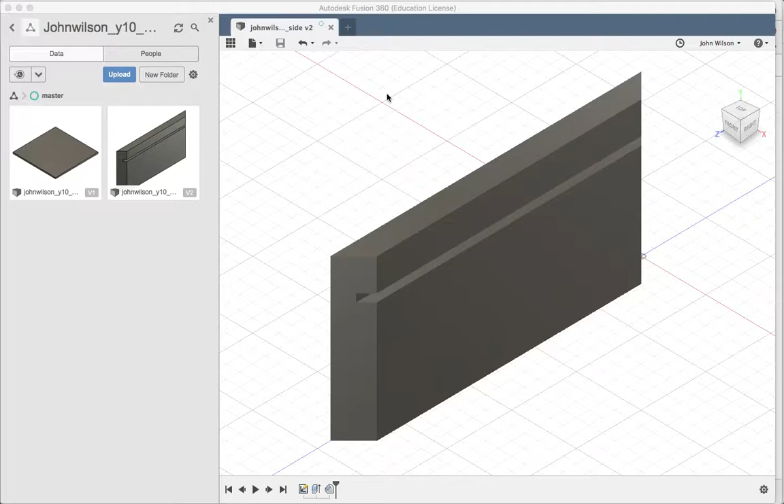Okay, so we're now going to start another drawing. I'm going to click a new tab there. I can close that one if you want, it's all saved, so it's all good. And this drawing is going to be our assembly.

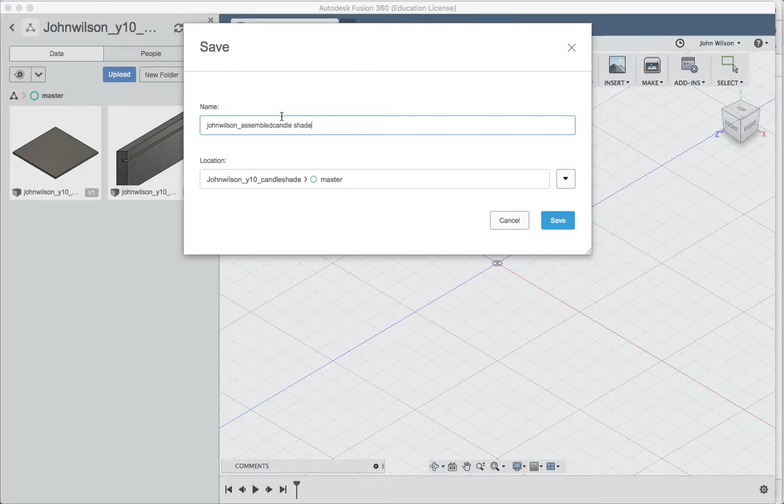Okay, same routine as before. Sorry to keep boring you with the same thing, but it does take a bit of getting used to. So, John Wilson assembled candle shade, there we go. Make sure we're going into our right folder, click save, and a little thumbnail is going to appear.

In our data panel here. And so we can make sure that we're saving as we're going. We're not going to lose everything. Close my data panel, get plenty of space. Oh sorry, no, beg your pardon, I'm going to leave my data panel open for this one, and you'll see why in a second.

So the first thing I'm going to do is look at our blank thumbnail here because there's nothing on our drawing yet and we haven't saved anything. The other thing is, you won't be able to carry out the next operation unless you've already saved it, so make sure you saved it as assembled version.

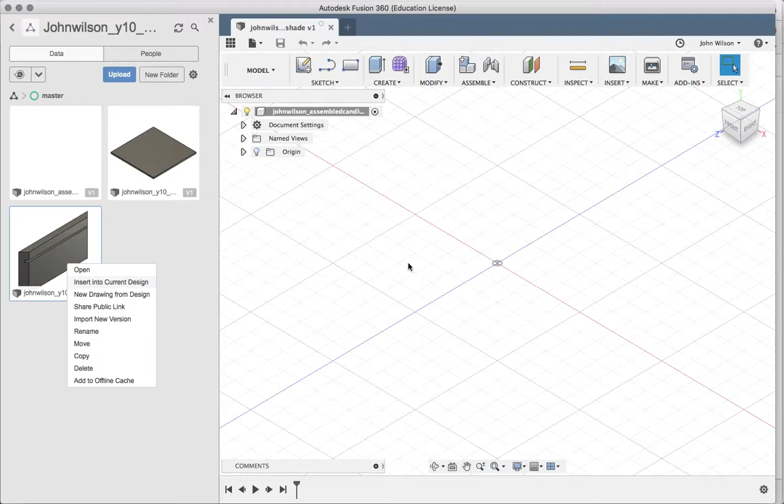And then I'm going to right click on this one, and you'll see that it's got an option to insert into the current drawing, current design. So I'm inserting our side piece, which we've already done, into the new one here. Okay, and it's going to pop up and appear there.

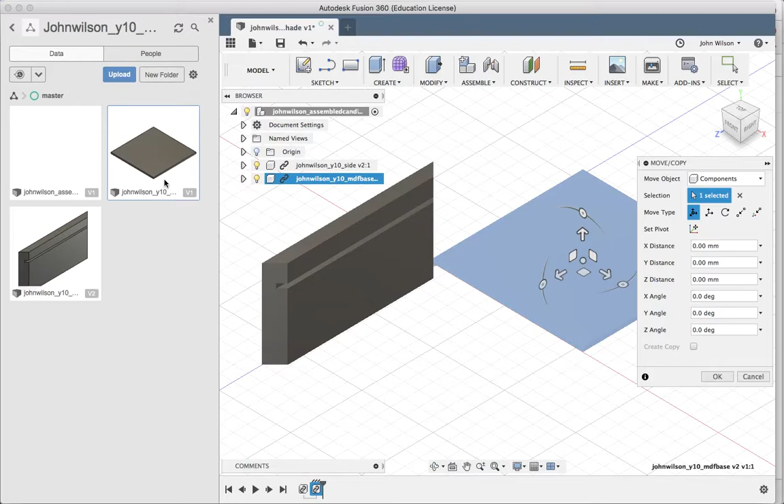So as soon as you put it in there, you'll see it's highlighted blue, telling you what the drawing name is. I'm just going to click OK on that. Then I'm going to do the same for this one, and when I insert this, there you go, same thing again, I'm going to click OK.

Now, at the moment they're not in position, they're not in their relative positions. The piece of MDF is supposed to be in the slot. So how do we do that? Well, the way we do that is by selecting the pieces that we want to touch.

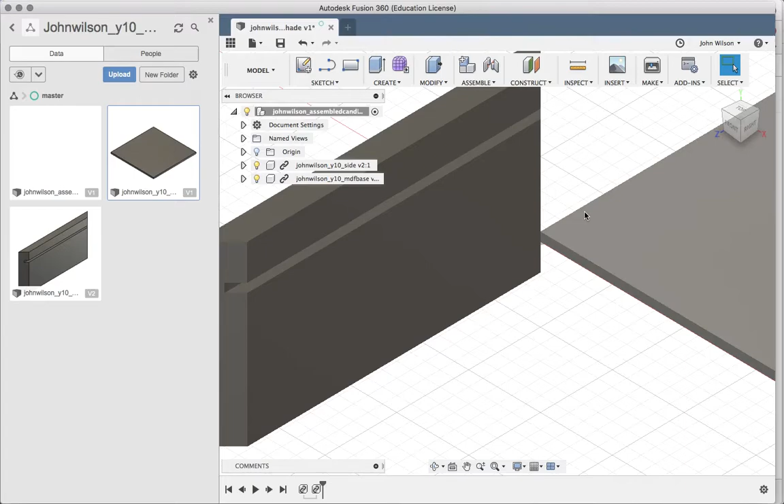There's various ways we can work with this, but what I'm going to do is select the top edge there. You'll see that's gone blue. And then if I just tilt this slightly so I can see the inside, think about it logically: which edge is that supposed to be touching?

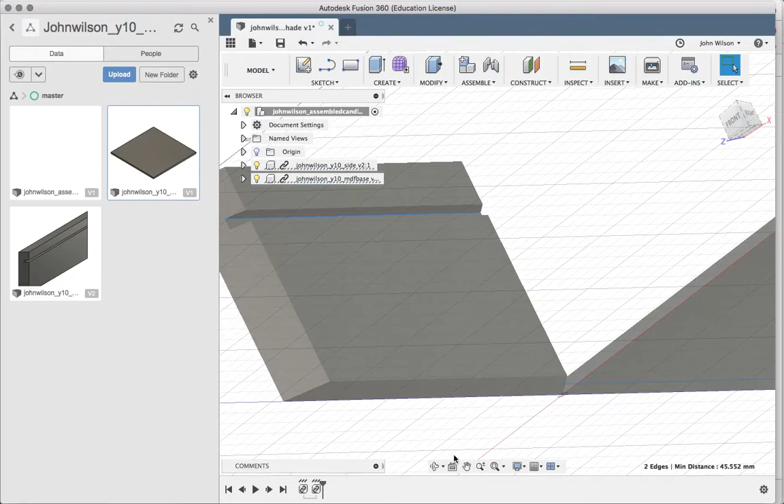Well, the answer is if I flip this way and press escape - remember you'll need to hold your shift key so that you don't just deselect the first edge. So now I've got two selected, two edges, that one and that one, okay? And then I'm going to press J for join, and the first one I selected is going to slide into place in the second one, okay? So if I have a look, there you go, my MDF base is sitting

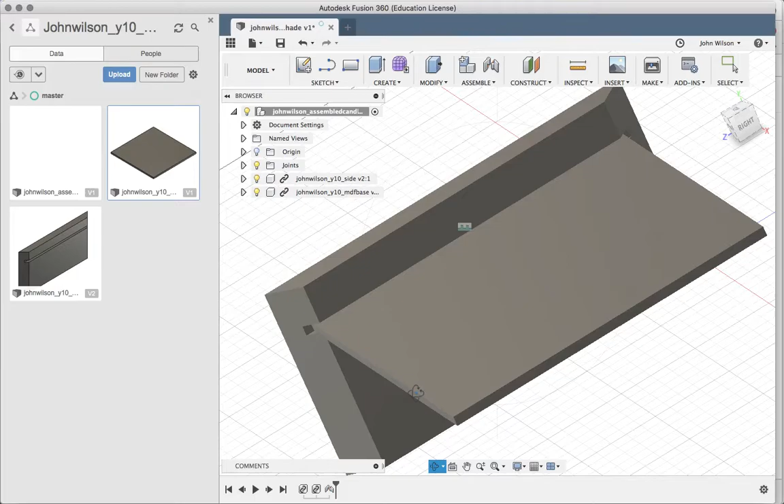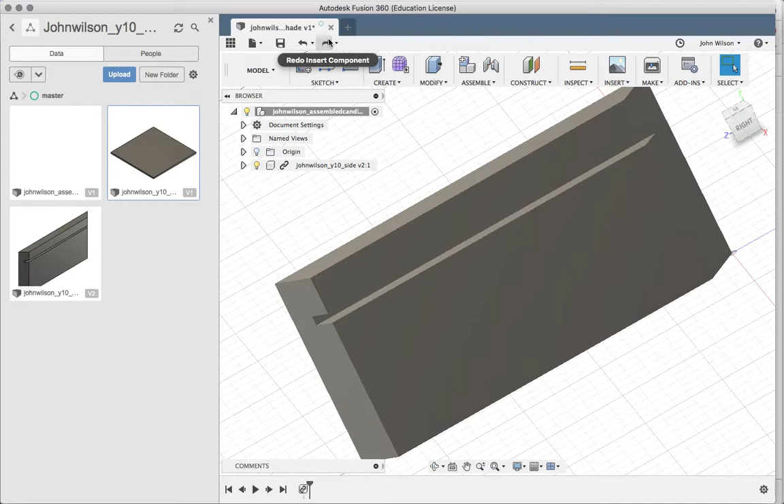inside my slot, okay? So next thing, if it doesn't work for whatever reason, use your undo button, go back as far as you need and just do it again. It's the classic case of if at first you don't succeed, try again. But it is selecting the two edges that should be connected and then pressing J to join them.

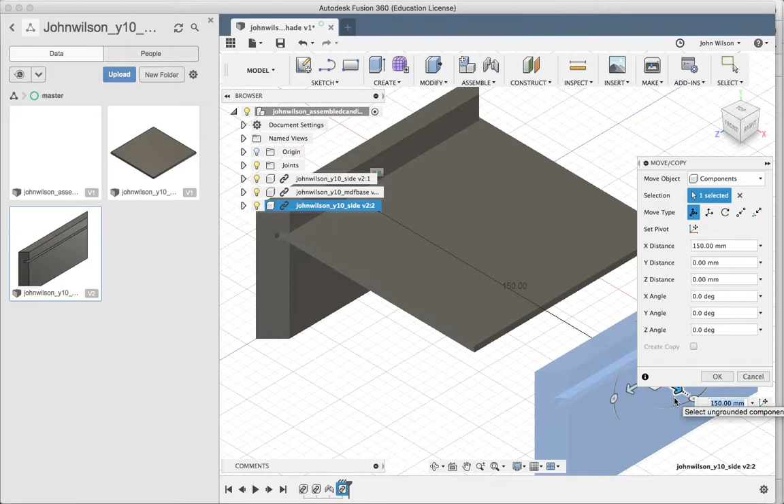Okay, so at that point it's relatively straightforward to insert the second one. However, what you need to be careful of is this: when you insert the second one, it goes into exactly the same place, literally sitting on top of the first one you did, and you'll notice it's shaded blue. At this point, come onto one of these arrows and move it away, because it's not supposed to be sitting directly on top.

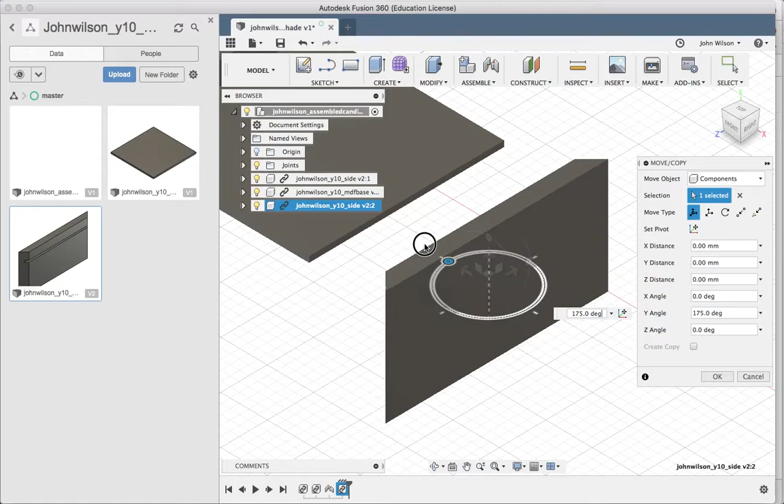And using one of these, you can rotate that in a range of different directions. But look carefully, which direction do you want to rotate it in? Well, obviously I want to rotate that way by 180 degrees, and it's telling me how many degrees I'm rotating it by, and there you go, 180. Then press your enter or return, okay?

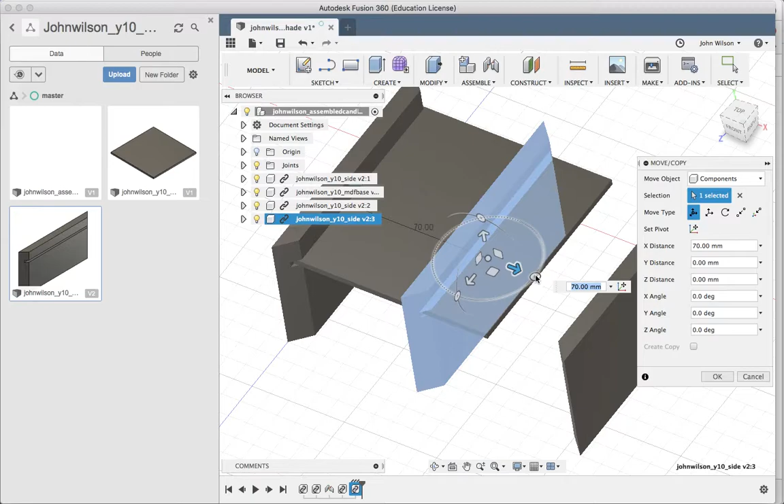And then at that point the process should be relatively straightforward. I'm going to do it with my two other sides as well. So let's insert that into the current design. And again, same thing, it's going to come out not where I really want it. So I'm going to rotate that one by 90 degrees that way, and move it back this way, and press OK. And then I'm going to do it a fourth and final time.

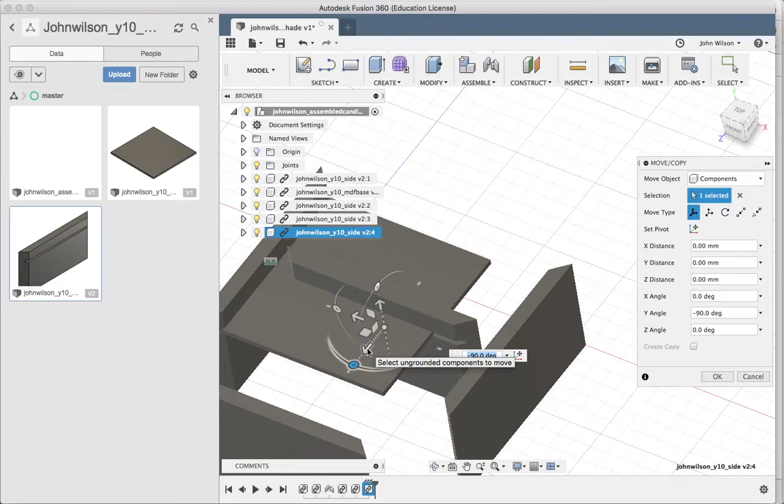Again, it goes straight in on top of my previous one, not where I want it. I want to rotate it by 90 degrees that way. Just be careful, 95 degrees would obviously throw everything out, so be careful about what you're doing there. And there you go, and then you're just going to use that J command.

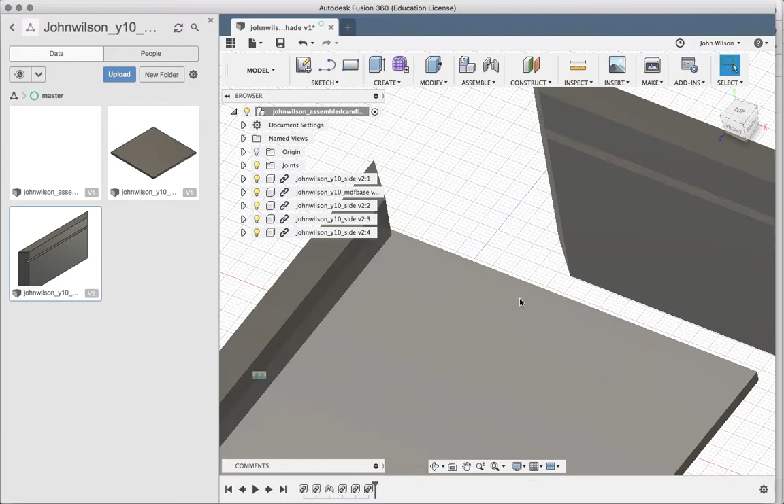Now you can select an edge like this, you can actually just select a point if you want. The important thing to understand is that the first one you select will move to the second one you select. So let's zoom in so we can see clearly what's happening. I'm selecting that edge; the first one is going to move to the second one. Press J, and you'll see it does a little wiggle. Press enter or OK, and there you go.

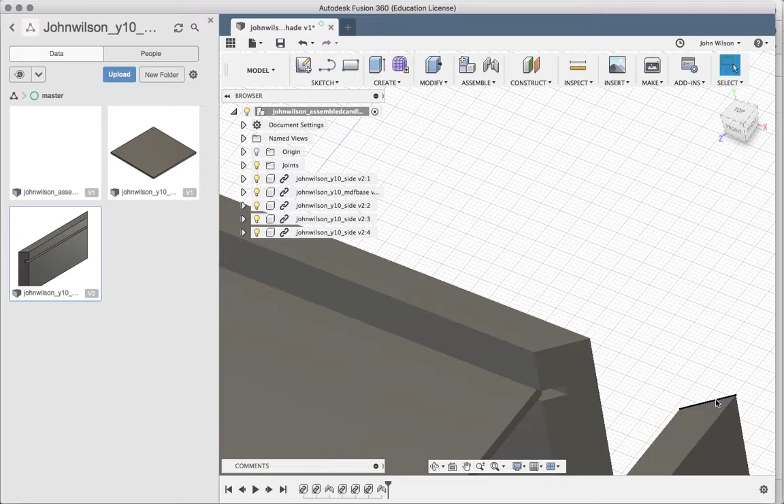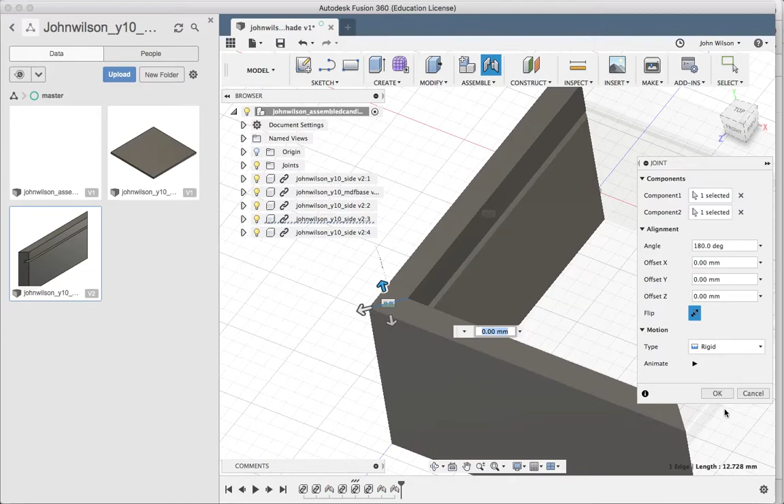And then obviously repeat that process. So the first one, press and hold shift, will move to the second one when you press J. Click OK, and it's exactly the same of course for the final one: the first one you select, press and hold shift, will move to the second one when you press J. At that point you can click OK, and you can click save.

And as soon as you click save and OK, it's going to appear there. So now you've got an MDF piece, you've got a side piece, you've got a base. And the only thing we still have to do is make that actually look like bamboo. Okay.